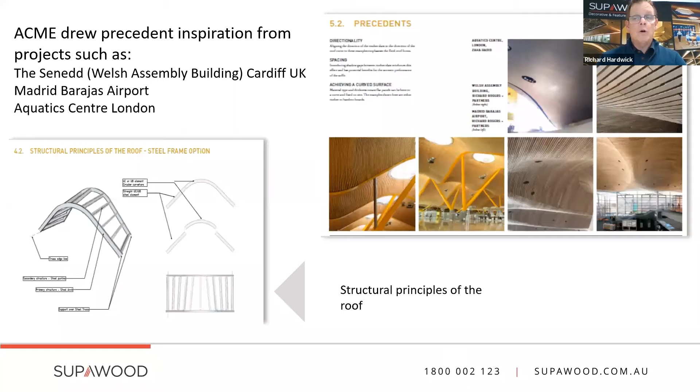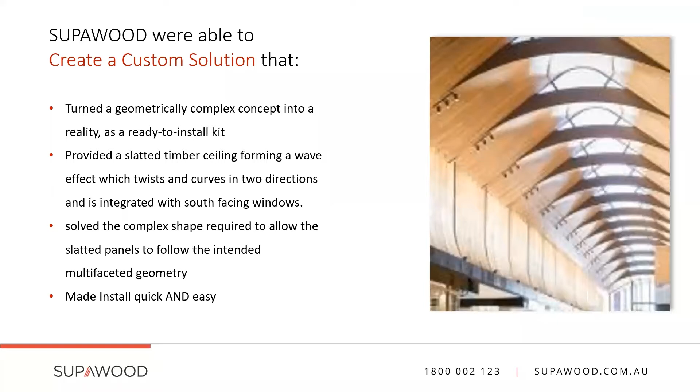This $50 million project involved major renovations and extension to the Gold Coast's largest shopping destination. It had to be delivered whilst maintaining the operational capacity of the existing centre. Therefore, a different solution was required. The slatted timber ceiling forms a wave effect which twists and curves in 2 directions and is integrated with south-facing windows, this effect being repeated several times down the length of the mall. Supawood was the only company who were able to solve the complex shape required to allow the slatted panels to follow the intended multifaceted geometry. The solution was a bespoke concealed notching design applied to the rear of the panels, whilst meeting fire compliance.

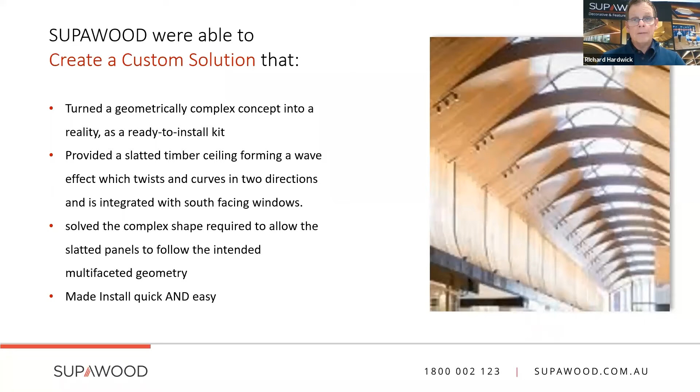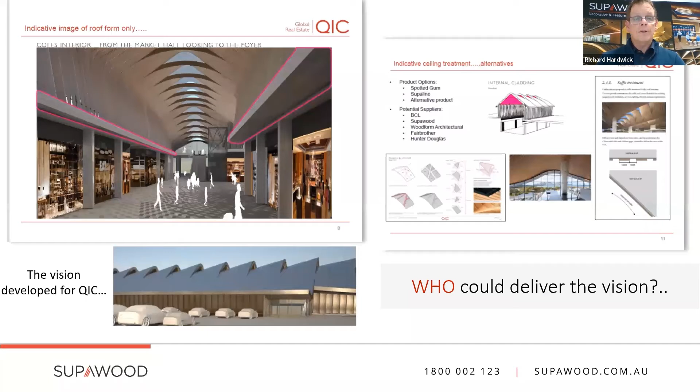As you can see here, this was the vision developed for QIC, and this is what they were hoping to realise. As you can see in their report, they listed some potential suppliers to bring this to life. Now, what you can see here is a typical design solution that was offered to ADCO, who were the chosen contractor. And this solution involved the sequential nailing of individual slat forms, forming an amphitheatre type concept. And it allowed visibility of the fixings from the elevation perspective.

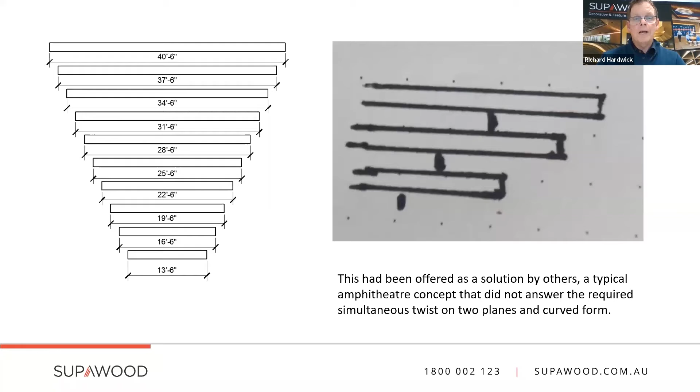So not really the solution for the complex design geometry that was required. And that requirement was the twist on the two planes and the simultaneous curve. So we were the only company who were able to solve the complexity of the shape required to allow the slatted panels to follow the intended multifaceted geometry.

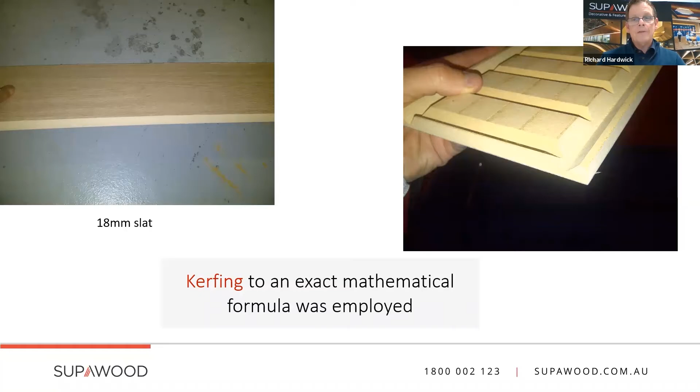The solution was a bespoke concealed notching design applied to the rear of the panels. This is called kerfing, right? We have the necessary mathematical expertise to provide solutions for these complex design types.

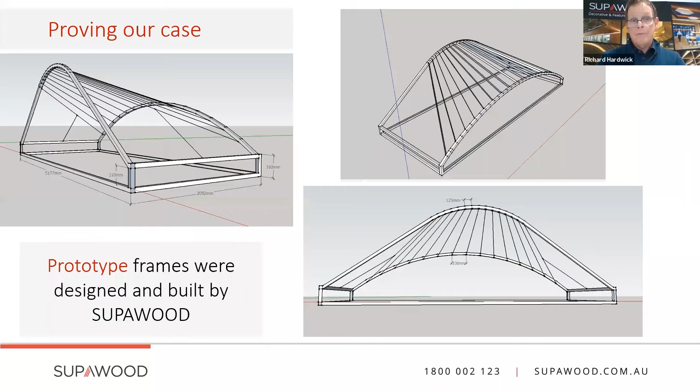To prove our case, we designed and built a prototype frame in our factory based on the architect's design. Here is the prototype test rig that we constructed on our site here in Bathurst. We applied our mathematical formulation in the concealed notching process and applied it to the frame.

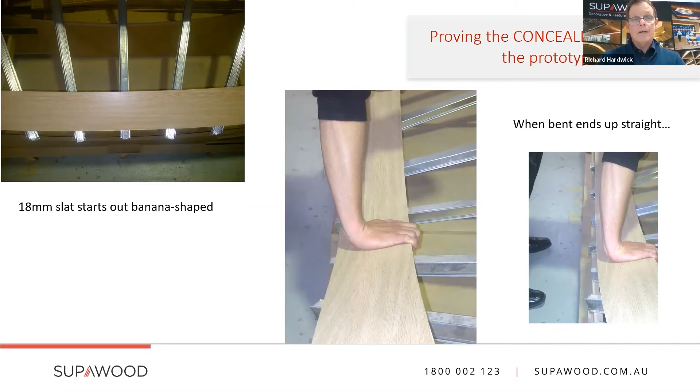Okay, so these were 18mm slats that started out basically as a banana shape, and when bent, they ended up straight. So quite complex. ADCO came to our Bathurst facility to view our prototype test panels and came away confident in our capabilities.

Understandably, for ADCO, risk was a major factor. Nothing quite like this had been done before anywhere using the modular panel system that was needed to be able to install the vast expanse of the ceiling in the required program time.

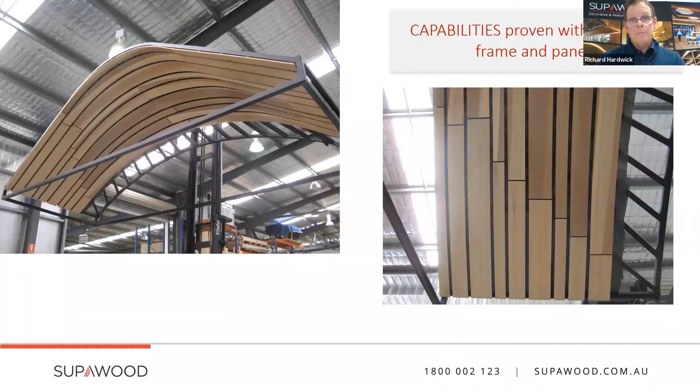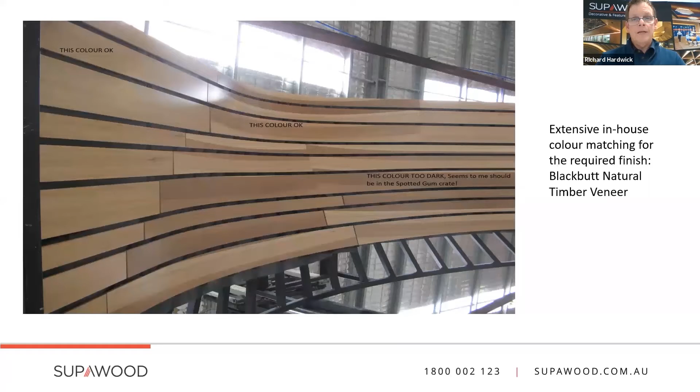What you're looking at here is the level of detail that we involve ourselves in. So what you're looking at are our notes applied to the photographs of our samples. So this involved extensive in-house colour matching for the required finish, which was the Blackbutt Natural Timber Veneer.

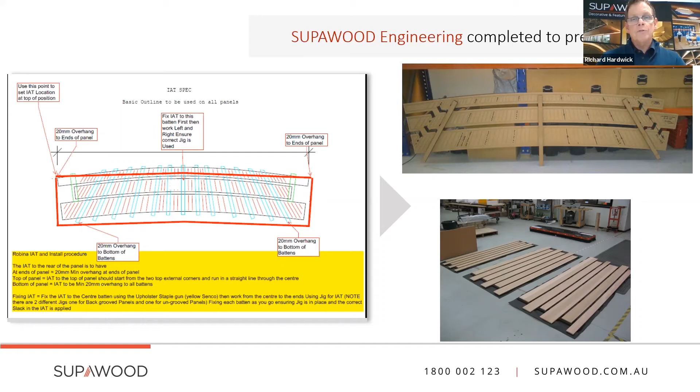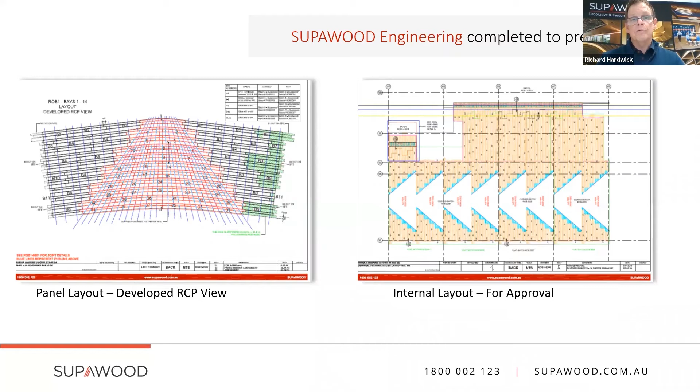Here you're looking at the integrated acoustic textile installation procedure and its application to the configuration samples. So this was all sequential, okay? What you're looking at here is basically Supawood's engineering capability. So we've developed an RCP view, and this is the internal layout. You can also see this was for approval. Now, the elevation on the left was for approval.

Now, what I'm going to talk to you about here is the fact that we have the capability to open and interpret across a range of design platforms. So we have Revit families, we can do AutoCAD, SketchUp, etc. Okay, so we've got the ability to open and interpret your drawings, and then where you require the support in the detailing, we can edit your drawings and then communicate back to you. On the right there, you're looking at the grooved panel construction set.

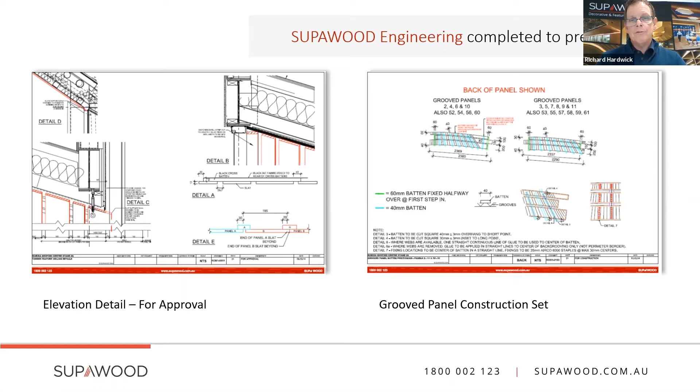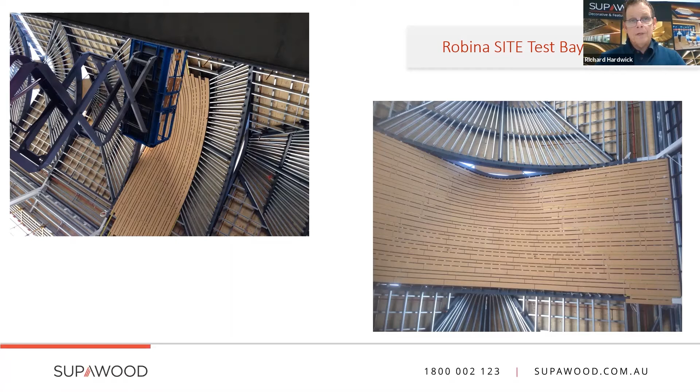The next step, when all of this was completed, was a requirement to complete a test bay at the Robina site to demonstrate to the builder the simplicity or the practicality of the installation. Okay, so that's what you're looking at there.

What we did to achieve this for the installer was to supply a sequenced set of installation instructions for the project. Now, this is our standard, particularly where innovative designs are employed. Builders and installers are not left guessing. We also provide on-site technical and practical assistance.

So what I'm trying to communicate here is that the more you involve yourselves with an innovative supplier like us, the more likelihood you are to achieve the reality of your dream, right? It's our mission to bring your dream and turn it into that reality.

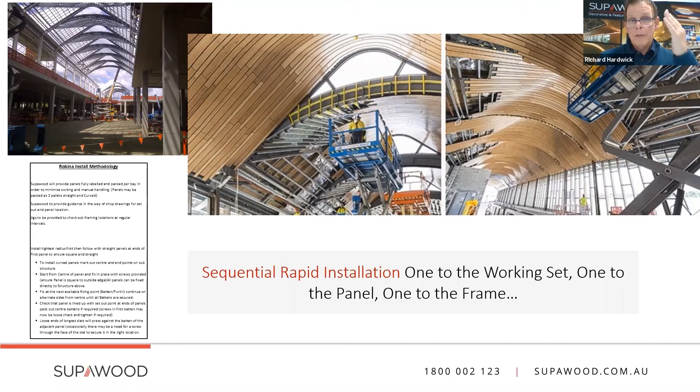And so for the installers on site, there's no guesswork. It's follow the numbers. Number 1 to the working set, 1 to the panel, 1 to the frame. Okay. Now, when you're talking about post-installation, it doesn't finish there for us. Natural timber veneers can vary in colour within the same species, as you'd be aware of. Here we identified those that we considered too variable, and we had them French polished on site.

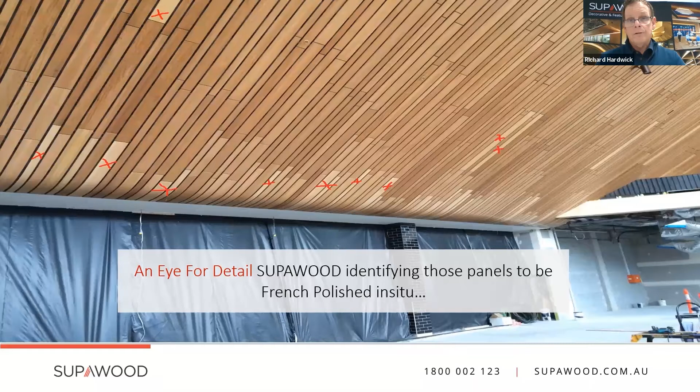And there you have it, the perfect form, okay? And as you can see from that elevation perspective, the kerfing is concealed, okay? So we met exactly the intent for the project.

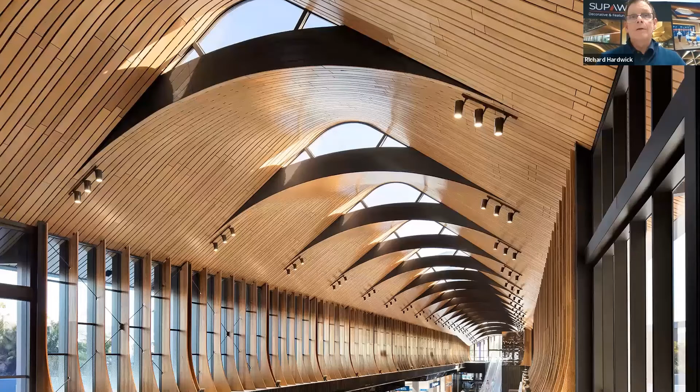This is what it looked like when it was finished. And it's just grand. And this is what the project manager for ADCO said about us: an architectural marvel on paper being turned into a reality by the Supawood team.

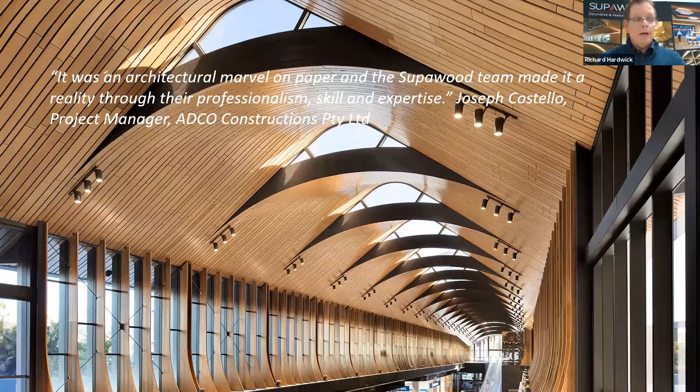All right? So that gives you a bit of a background for our main feature today. And that's where we're going to be talking about Knox Grammar Performing Arts Centre and Junior School Academy. This was a consultative collaboration between NBRS Architecture, PKA Acoustic Consultants, Taylor Constructions and Supawood.

So, Damien, can you set the context for this project and NBRS Architecture's involvement with Supawood, please? Yeah, certainly. Thanks for having us on this evening. It's been a great opportunity working with Supawood on a number of projects, and this one in particular, as we'll see from some of the photos and the design, was really exciting.

We obviously were working with Knox Grammar School on the project for a performing arts centre and junior school academy. And it was a real combination of academic learning spaces and performing arts learning spaces and the experiences of using those spaces and spaces around them. So like NBRS, Knox Grammar School is very passionate about all learning and giving students the best opportunities available to enhance their future and the society that they live in.

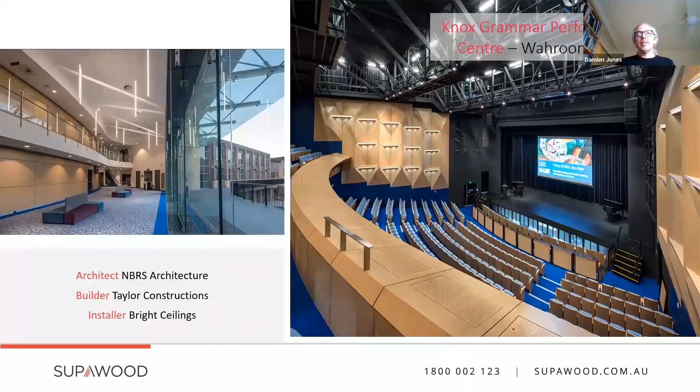Performing arts itself enhances emotional intelligence, collaborative skills, and life-changing experiences. So being able to work with Knox Grammar School in developing the design and going from that right through to construction and working with Supawood was a very special and great opportunity. Okay, so thank you for that, Damien.

NBRS Architecture was commissioned to design the state-of-the-art Performing Arts Centre for Knox Grammar, aimed at inspiring and promoting the school's cultural life. When choosing products to be used, achieving acoustic excellence and BCA requirements were a priority. So Supawood were chosen as they offered customisable lining products with full technical support from beginning to completion. Now we're going to be looking at the three main areas that needed to be addressed.

The main theatre, which is a 750-seat space used for drama, musicals, assemblies and seminars. Rehearsal room 1 for the music ensembles, the orchestra and pipe band, and the choir training room. And we're also going to be looking at the entrance or the atrium lobby. So this is what you can see on the left-hand side. So this is where it begins.

Let me ask you, Damien, how did the design progress and what were some of the key components that had to be addressed? Yeah, great. If you don't mind just flicking back to that last slide, my apologies. Yep. That's a great question because obviously we're wanting to provide the best opportunity for the students, for the school and for everyone who uses the facility. And I think these pictures really help to gather a bit of a picture of what that was.

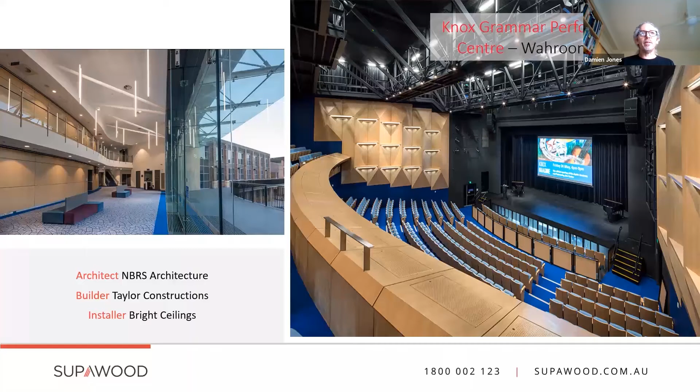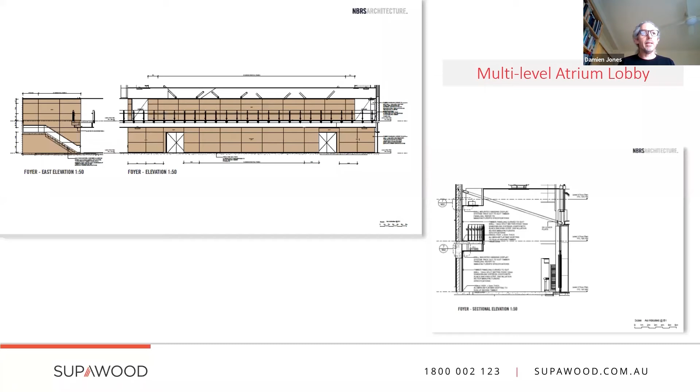So starting off in the foyer, in the next slide that you had there, some of the considerations that we had, obviously we've got our fire considerations as you typically do. We have acoustic. We have the construction considerations, a nice curved wall, a number of people using the space as well. And in this particular space, and we'll touch on it again a bit later, you can see the curved wall there, it's a lovely shot.

Just below the mezzanine floor there and above the Supawood panels, you can see a black trim as it wraps around the corner. So we've got a concealed hanging system there so that the school could use this as an art space as well. So there's a real flexibility in the design and the use of the space. That builds a bit of a picture. Yes, thank you for that, Damien.

Yeah, so what we do with these panels, similarly, the kerfing process that we employed on the previous project, we utilised that with these panels to an exact calculation relative to the required radius. The timber finish complements the other materials used as well as providing a highly durable wall surface. So these panels were installed using our split batten fixing detail.

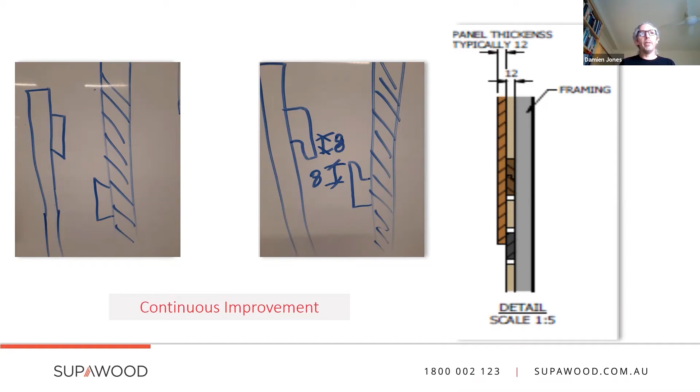The way that they were installed also enabled us to have a nice clean detail at the top of the wall where our picture hanging detail was installed, again with concealed fixings. So it provided a nice, clean finish to this wall, which, as I mentioned before, was so critical because it's the first thing you see when you walk into the building. And aiming for a world-class product, a world-class space that provides an experience that you're going to remember, we wanted the best finish that we could, and we're really happy with how it turned out. Okay, thank you for that, Damien.

Now, we're now looking at the multi-purpose theatre, and I'm going to read this quote from a Knox student. This is what a Knox student said about this. When you look at a piece of music, it's just notes on a page, black dots on a page. They're not real until you bring them to life. The great joy about playing music, it's a great way to bring people together with the same interests. So now, Damien, what did that mean for the NBRS team?

Yes, well, it's a beautiful quote, and it was by a student who was sitting in one of the music classrooms within this facility, who's very articulate, and being able to read that after the event was a real joy. And it's so easy to see the correlation between the journey that we went through from design and conception, developing that design, and into the built form. So there's many opportunities that we had to take it from our concept, developing that in the design, and bringing it to life. So at NBRS, we're really keen that we're creating life-changing environments.

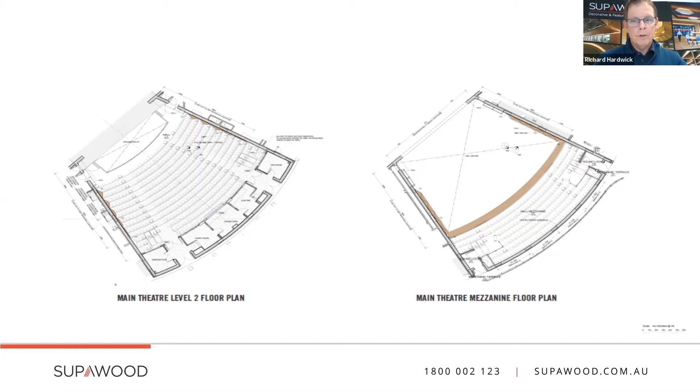Yes, it was. So this is the floor plan of the main theatre, as you can see. It's a fan shape in plan with a stage at the top left-hand corner and the rear wall at the bottom right-hand corner. And part of the challenge is we worked with PKA Acoustics, who did a phenomenal job, in talking with them about how we can optimize this space to get the most out of it, acoustically as well as architecturally. So the side walls are approximately 20 metres long, 12 metres high. It was a huge amount of wall space to be looking at how do we treat this architecturally, but also how do we treat it acoustically to maximise and optimise this space.

So as PKA reviewed the space, looked at the design, how the acoustics were working, it became evident that we needed to have some sound reflectors on the side walls of the auditorium, as well as some treatment.

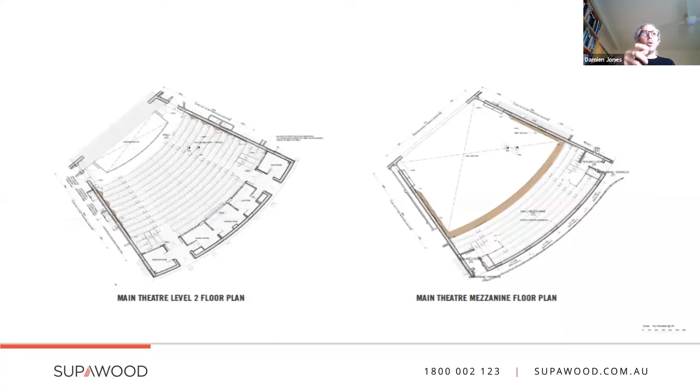So these reflectors were able to manage the sound to develop the acoustic performance. Without them, the performers on stage wouldn't have been hearing the sound as it made its way around the auditorium and would have been feeling more disconnected. But the acoustic design was able to use the acoustics of the room and the reflection of those acoustics to maximise and optimise the acoustics in that space so that the performers on the stage would feel like they're connected to the audience, which was really important.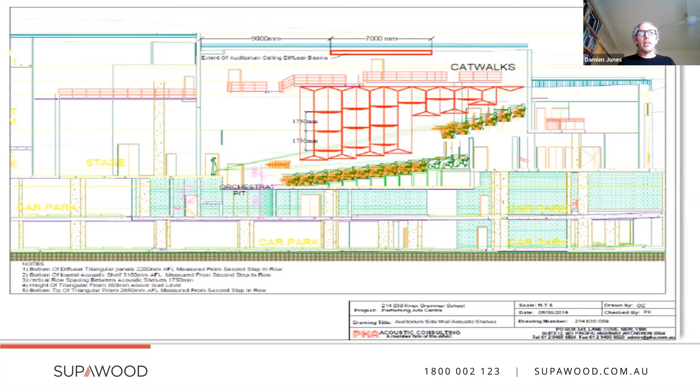NBRS worked with PKA to develop this design. I think you might see more of that on the next slide. So that as people are sitting in the space, they're aware of these side reflectors just above them, but they're not obtrusive. We wanted to make sure that people felt comfortable as well as being able to enjoy the acoustics of the space. That the size of the side reflectors were proportionate to the side walls and the rest of the auditorium, the main theatre.

And you can see on the right-hand side there was an incorporation of some lighting into the acoustic shelves as well, which you would have seen in some of the photos already, which just adds another level of design and experience into the space. And those lights actually rise and dim with the house lights, which it was really lovely being in the space and seeing other people's experience of that when it's in operation.

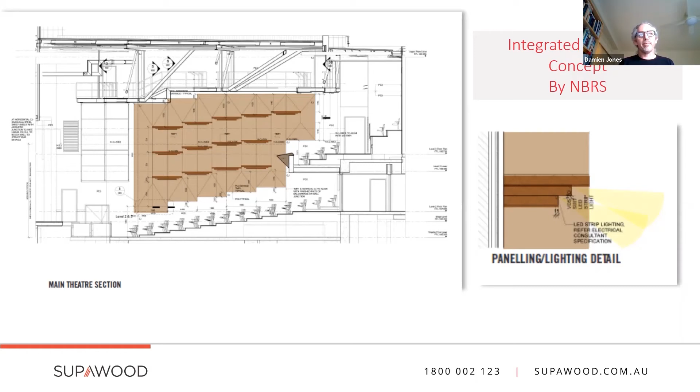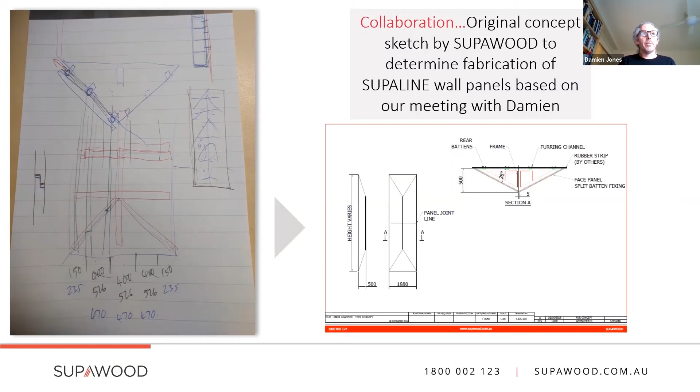Yes, I remember having the conversation with Colin on site. It was a lovely experience. Right from the beginning with Supawood, we needed a material that was compliant with the BCA. So we needed our fire compliances. We needed something that was acoustically appropriate, aesthetically appropriate as well, and something that we could use throughout the building. So we've already seen it in the foyer and now the main theatre. So being able to know that Supawood was able to provide that kind of product that would look great and perform as well as we needed it to.

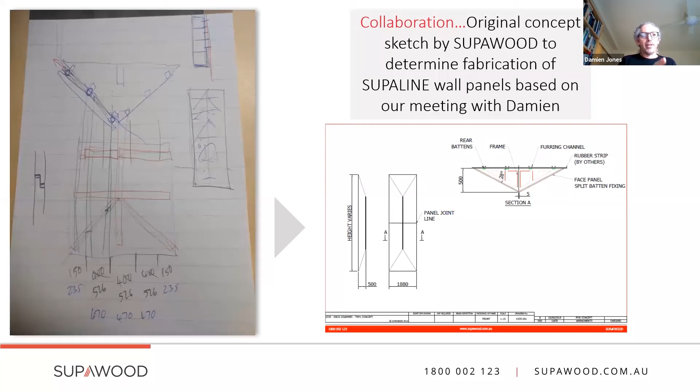And I remember sitting down with Colin and talking through taking it from our construction design through the shop drawing process. And you can see some of the working out of where the Supawood framing was going to go, how that correlated to the studs in the wall behind the Supawood frames, and how we managed control joints was quite an interesting process to work through as well.

But there was a lot of experience that Supawood were able to bring in terms of the framing, the fixing, how it all went together to work with the construction constraints like control joints, as well as the architectural constraints in providing something that worked with the space, as well as the acoustic requirements. Yes, this was interesting. This was our ongoing collaboration.

One of the notable points during this experience was with Taylor Constructions and some concerns around the perceived risks associated with framing areas for the wall panels. During our initial site meeting with the project manager, we detected a hesitation around this, and we stepped in to advise that we could incorporate the frame design and manufacture as part of our technical support, thus ensuring a coherent, seamless, sequenced installation methodology that would eliminate any error. That offer was accepted, and a sense of relief from the construction team was immediate. That's what we sensed. So this is our frame layout.

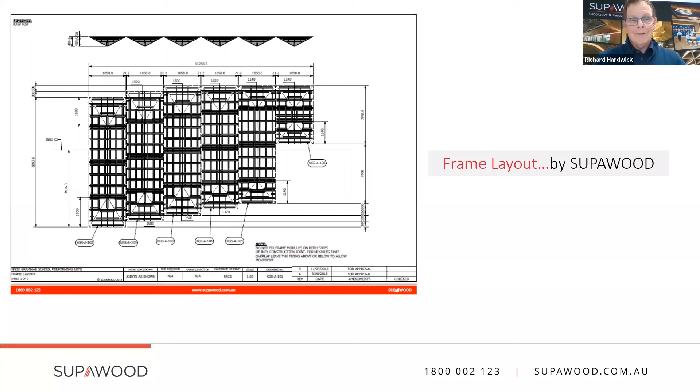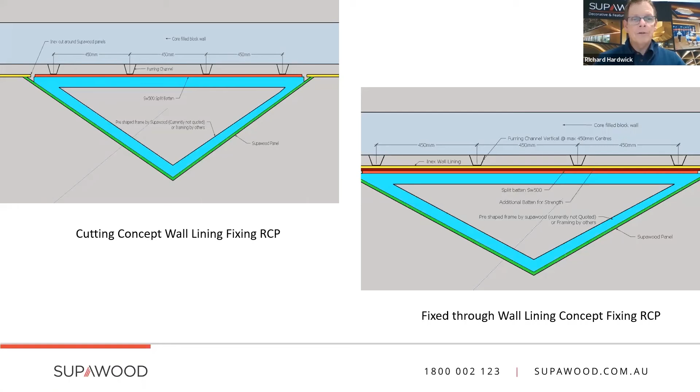Now, one of the other challenges that Damien has raised with our frame design was the acoustic wall cladding that was sited behind our frame. The frame couldn't be fixed on the joint line or directly below that joint line because of the differing expansion and contraction coefficients. So what we did was design a cantilevered frame in 3 sections that was fixed above the control joint and allowed for free expansion and contraction of the wall cladding directly behind it.

Now, what you're looking at here are the prototype panels and frames that we designed and built to determine the best means of fabricating these panel and frame shapes to make them work seamlessly. Okay.

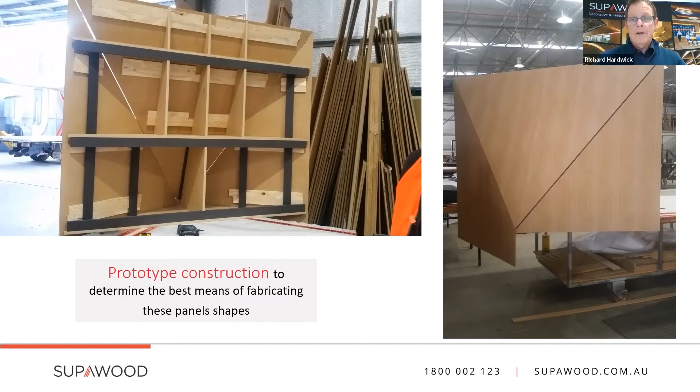Now, I was going to say here that NBRS and PKA coordinated with us to develop these shop drawings, and Damien spoke about this before. The main acoustic priorities were to ensure a reflective surface, the appropriate depth, and the angles of reflectors and dimensions to ensure the appropriate frequencies were addressed. Can you develop on this point, Damien?

Yeah, sure. You can see the triangular shape in plan there on the drawing. The proportions of that were very specific from PKA to get the right reflectivity of the different sound waves, and working that into Supawood's design. There were some minor tweaks along the way, but also in terms of constructability, it couldn't be too deep of a triangular profile, because then it became a bit tricky to actually be self-supporting.

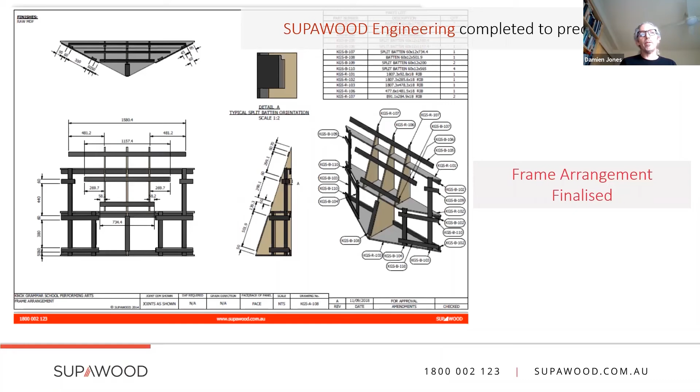One of the other elements that we were also able to talk to Supawood about, and Supawood were able to tweak further, was actually putting a polish finish on the Supawood surface, which added another level of acoustic performance to the product, which was fantastic.

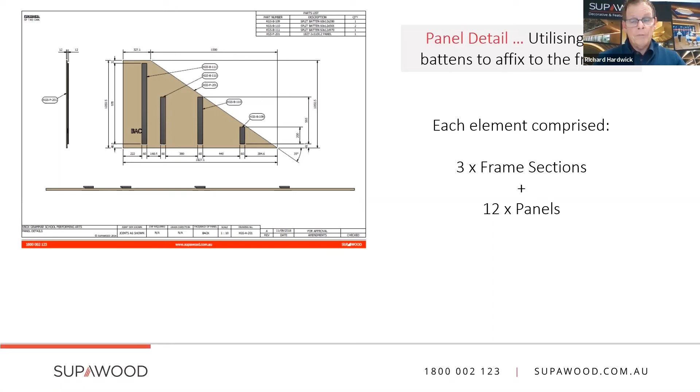Okay. Now, once the best method was determined and proven, all these shaped panels were constructed at our Bathurst site and delivered in a kit form for easy installation on site. And lighting features were also integrated into these panels. So this is what we're looking at.

Taylor Constructions, during our site meetings, also requested that we supply these integrated light boxes once they realised we could incorporate the wall panel framing into our manufacture and supply. This seemed to them to be a logical step, again, to eliminate risk. And it proved to be the right decision, as you've heard Damien describe.

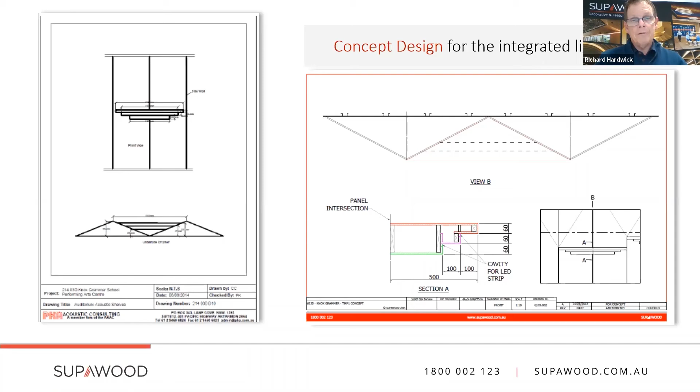Now, this is the shelf detail or the tier detail. This was achieved using pre-grooved folded panels that were delivered flat pack to the site and installed sequentially, stacked, but with each shelf independently fixed off to the wall behind with angles. Each shelf comprised a generous cavity to accommodate the LED lighting and associated wiring. To achieve the required proportions, we consulted with the project's electrical engineer.

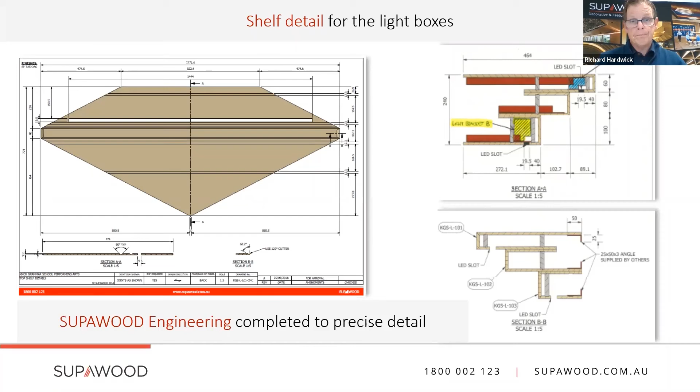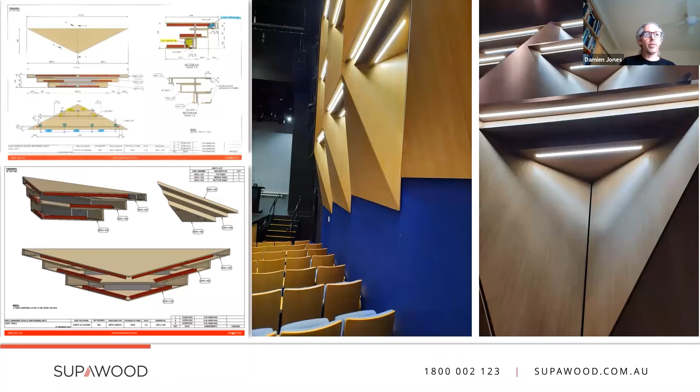Sorry, just in the mix of that, we also had to maintain proportions of each of those horizontal portions of the acoustic shelves; there were acoustic proportions that we had to retain as well. Yes. So it's lovely to look at. It works beautifully acoustically, but to make this actually work through the process of coordinating with the electrical engineer, the acoustician, the architect, the builder, was a real process. And I think it's quite a testament to how well the team worked. Yeah. With everybody on site. It was a real collaborative effort.

It was. Yeah. And for the audience, this is why it's important when you're thinking about these kinds of complex designs, whoever the supplier is, hopefully it's us, there is the real need to involve them in the discussions at the design intent stage, right? Because companies like us here at Supawood have the in-house expertise to engage in these conversations and make this kind of work happen, okay? And this work is precise.

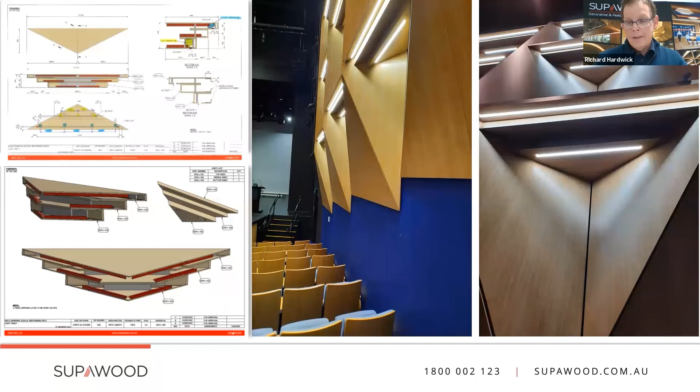Now, overall, for this internal space, we supplied a coherent step-by-step installation instruction guide to the installer. The installer was Bright Ceilings. The success of the simplicity of our kit and its installation instructions was proven by the total absence of any calls from the installer back to us seeking assistance. So there's quite a complexity to this, as Damien has explained, and what we did here was provide a very sequential kit form and the steps necessary to install it on site, step by step.

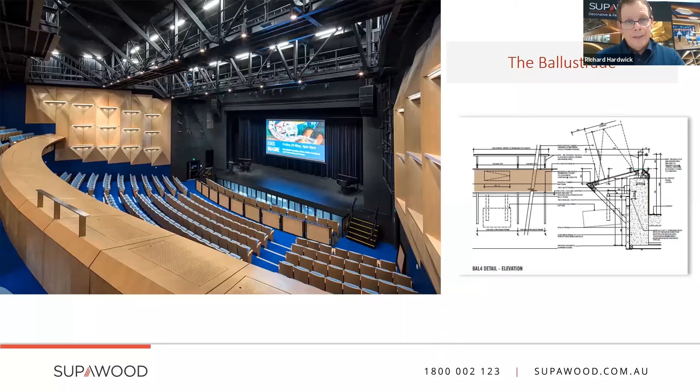So therefore, we had to adapt the design and the manufacture of our panels to suit the in situ form whilst maintaining that continuous curvature that you can see and the level, right, to meet your design intent. So as you were saying before, considerable dialogue between yourself, our engineering department, and the contractor on site to make this happen. And one of the other features was the use of the piano hinges that you can see there.

Now, compared to butt hinges, these piano hinges maintain a much longer lifespan, and they maintain a higher level of strength and precision for years after you put the final screw in and tighten it. They're fairly versatile, they're affordable, and they provide less noise when operated. So we chose this as a fixing detail in collaboration with Damien to ensure all of those requirements provided the access that the technicians needed. Those perforations too, that you can see in those access panels, allowed for ventilation through that.

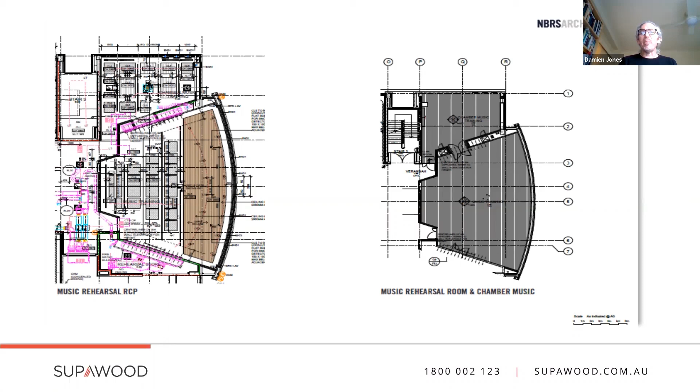We certainly did. Because the profile of the slats varied in height, having surface-mounted electrical services did pose a challenge. I think you might have seen on the photo, there were some surface-mounted lights. They were about 150 mil diameter, 200 mil diameter. Being able to work through items like that, smoke detectors, all those little things that can so easily get missed, but being able to work through the detail of how those services interacted with the Supawood product to ensure that when we did locate a surface mounted light, it had a flat space to sit onto. So the junction was nice and clean.

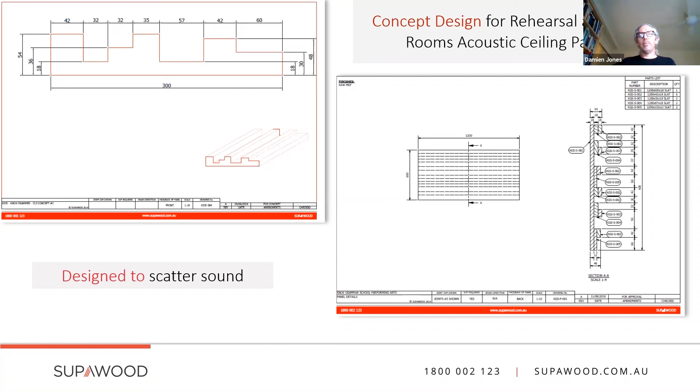We didn't see any holes or gaps in between the light and the Supawood product. But then at the same time, we didn't see large portions of flat surfaces. It was only underneath the service itself. Everywhere else, we had this lovely Super Slat product in terms of its varying heights. So it was quite a process to be able to work through those details. Yeah.

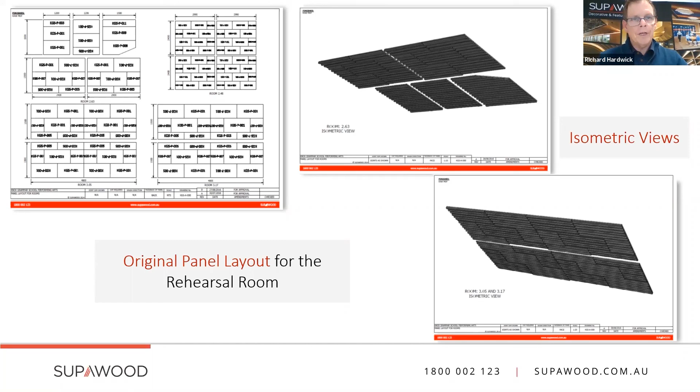Now, what you're looking at is based on the preliminary designs that were undertaken by PKA and Damien. These were the original details developed by Supawood for approval. Now, what happened here, after review by PKA, some panels were rotated to provide acoustic precision. So what you're looking at there on the left-hand side is that markup based on the advice provided by PKA.

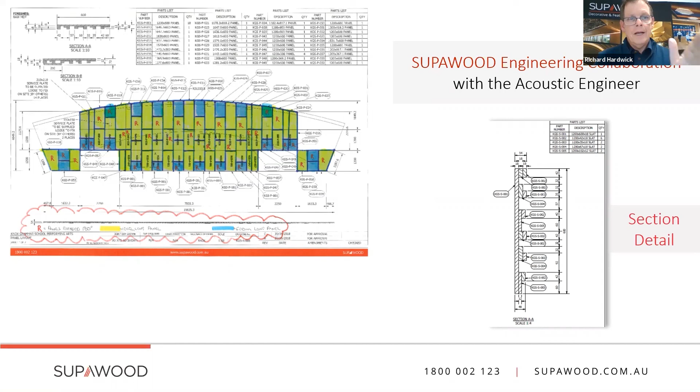So the red R's that you're looking at are those designated panels that needed to be rotated, okay? And that provided the acoustic precision within those spaces. The result: aesthetics and acoustic precision. That's what you're looking at.

So all of this to say, for the audience, you as designers, when we say innovation is collaborative, we mean exactly that. And we welcome your input. We welcome you to challenge us in your design. You've got a client with a need, you're the architect. Now you will think of a design innovation. When you're doing that at your concept stage, this is exactly the time that you need to involve someone like Supawood, okay?

Because that's when we dialogue with you and collaborate to work out all of the details that we've discussed during this presentation. Then by the time it gets to site for the installation, the builder is being paid to install, right? All of the thinking processes, all of the connection details, all of the compliances, everything that you need have been resolved prior to it getting to site. So you eliminate the arguments, you eliminate the mistakes. And then based on the success of that, we then market your success and release it to the broader community. That's how innovation is evolved through the design community.